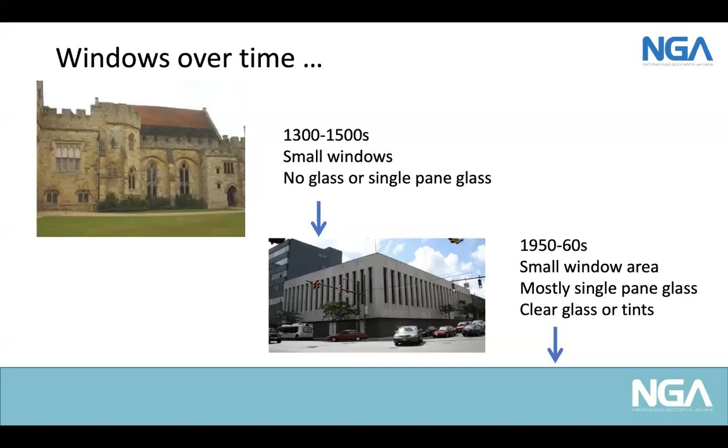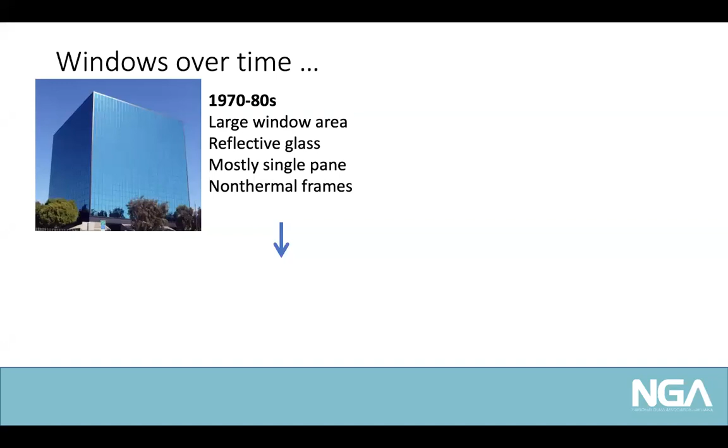Then let's go ahead another decade or two, and all of a sudden you see a huge change. Now you have large window area, these kind of reflective glass boxes mostly, but again, really not as much has changed in terms of energy performance. It's mostly single pane, non-thermal frames. The big difference is, of course, now you're seeing curtain wall construction where the engineering has progressed, where we can, from a structural and installation standpoint, do a building like this. But let's go to today.

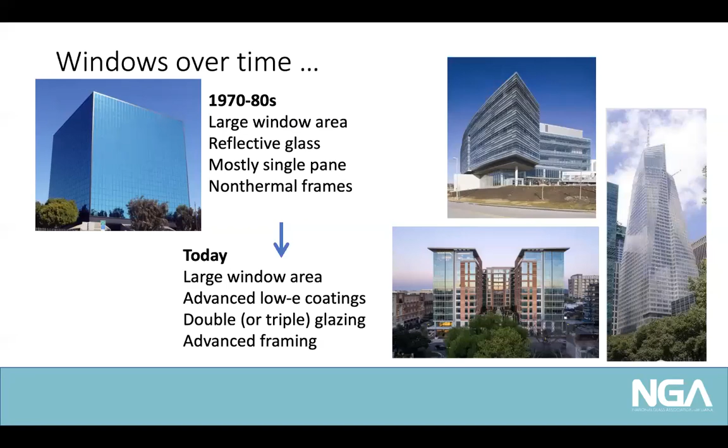So what do we see now? We're still seeing large window area. There's a reason for that: daylight views, health impacts, things like that. But the difference is now that you can do a high performance facade with advanced LowE coatings, double or triple glazing, advanced framing, and we'll talk about some of that today. But again, this is a good point to remind ourselves, why do we have windows?

Really, it's the human aspect. We design buildings for humans. We don't design them just to sit in a cave. There's the human aspect, occupant health and well-being. There's a number of studies done over the years showing that having access to daylighting and quality views produces better learning, faster healing, higher productivity, higher value.

Some examples show better test scores in students, increased retail productivity. Workers are more productive, absenteeism is less. In healthcare settings, you see decreased use of medicine, decreased hospital stays, which also has a financial impact as well as being beneficial to the patient, and increased retention of nurses and healthcare workers.

So it's really pretty dramatic, and it's just a good reminder that yes, there's a reason to have windows, yes, there's a reason to have daylight and views. But then how can we make that a high performance facade at the same time? There's some resources that NGA has with a lot of this information.

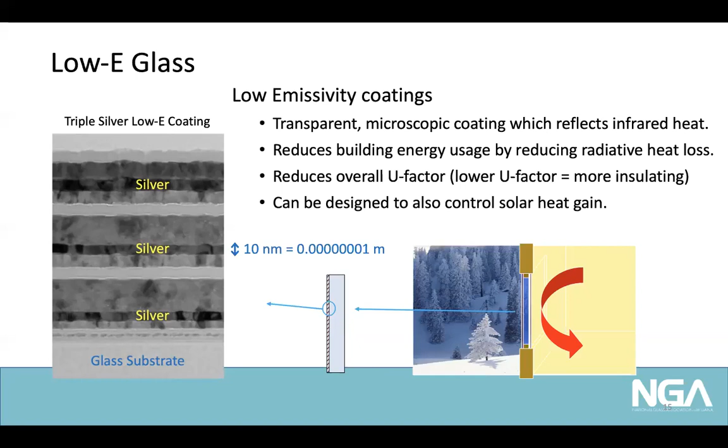But on top of that, you can tune all those layers in there to control solar heat gain, either high, medium, or low, whatever you need for that particular building. So it's kind of serving dual purposes in that circumstance.

You have clear, ultra clear, low iron glasses, tints, LowE coatings, reflective coatings, dynamic products, laminates, films, and it's not just one or two, there's thousands. So it gives you an idea of the range of technology that's in glazing today.

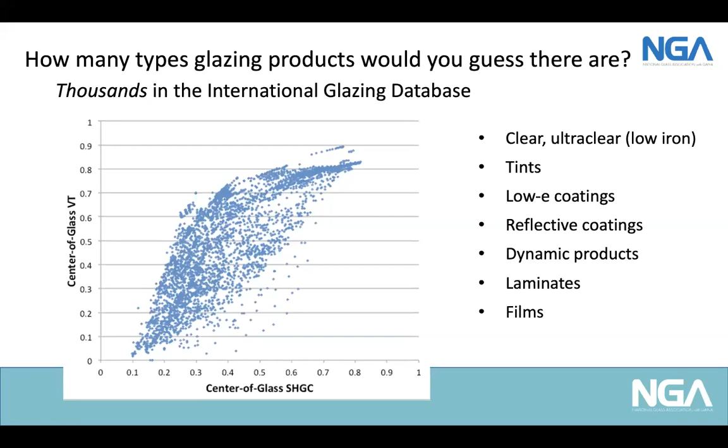So what are some of the newer types? There's a wide range of LowE coating types. It's not just LowE, there's LowE in every range of solar heat gain. SHGC is solar heat gain coefficient, from high passive solar for cold climates to very low solar control for hot climates. So it can be tuned for what you need in northern Minnesota or southern Arizona.

I've shown that picture of a triple silver coating. It has 3 silver layers in it, and it's designed to give low solar heat gain, good solar control, as well as low U factor for the southern climates. There's also a new generation triple silver, which has even lower solar heat gain.

Again, with this wide range of technology, you can have colors or color neutral, and you'll see all of the above available when you look into the marketplace.

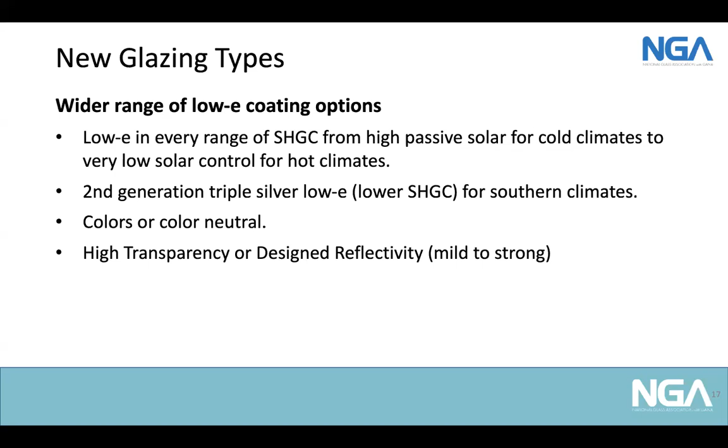The other new trend we've seen is, for a while, it's all about high transparency. Now that seems to be going back a little bit, where it's really up to you guys, the designers and architects. Some people want a very strong reflectivity, especially places like the Middle East, but others want no reflectivity, high transparency. Now there's a new set of coatings out there that give mild reflectivity to try and strike a balance between.

What else is out there? Dynamic glazing - hopefully you've heard about this by now. Dynamic glazing means it has the ability to change its properties. It's not just the same solar heat gain and visible light transmittance all the time. It can change. The most common are electrochromic or thermochromic glazing that can reversibly change its properties to optimize energy performance and glare control by the hour, the day, the season. It can be controlled by photosensors, occupancy sensors, time scheduling, or even just manual controls.

The solar heat gain can vary in the same product throughout the day, from about the range I typically see, which is from about 0.09 up to 0.47 or so. The VT, the visible light transmittance, can range even a little farther, from about 0.02 to give very good glare control, all the way up to a transparent coating, like a 0.62 range. So a wide range of control.

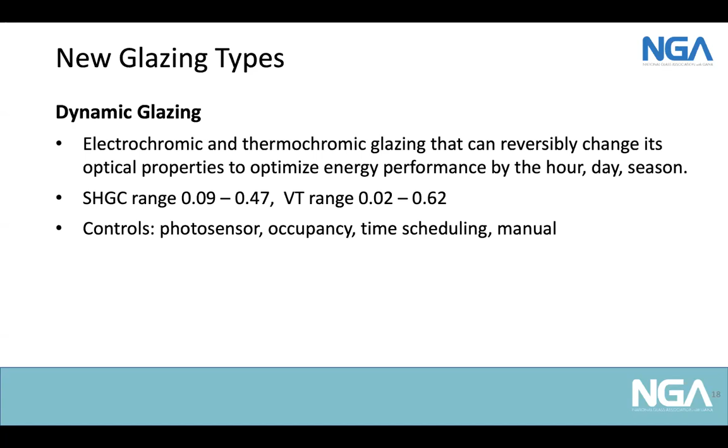I will note that privacy glass should be viewed differently. You may have seen this - it's usually used on the interior, like in office spaces, where you flip a switch and it'll turn from clear to white or other colors. It's more for privacy. That actually doesn't have much impact on solar heat gain, so it's usually not used on the exterior of the building. It's more changing it from a transparent to a scattered, translucent look. So in my mind, I consider dynamic glazing and privacy glass as separate products.

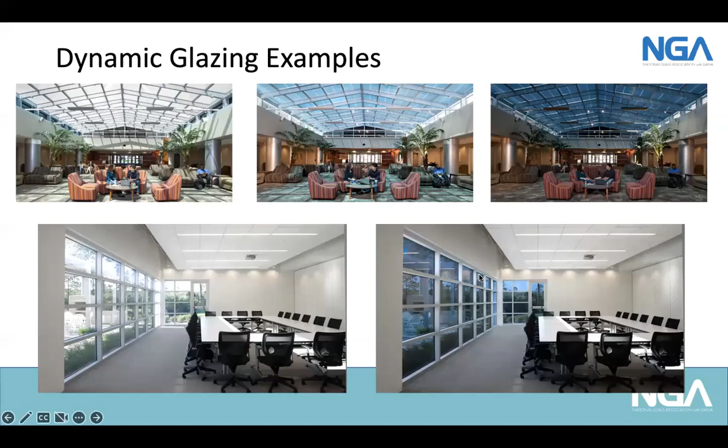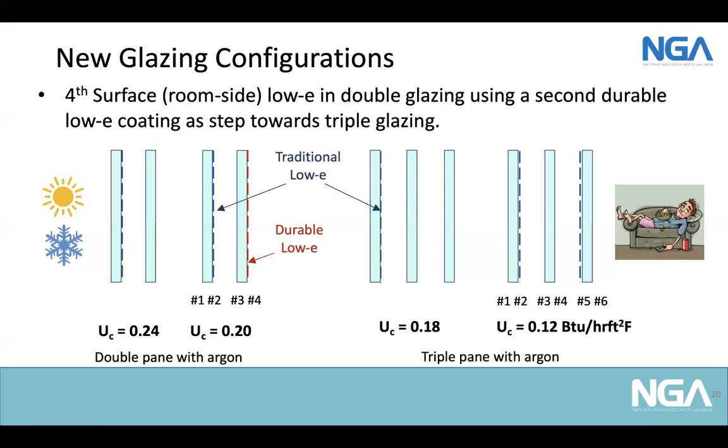Most traditional placement is on the number 2 and number 5 surfaces, although you can do other things as well. And then all of a sudden your U factor for the glass only is dropping down to 0.12, so very high performance.

The other one I want to mention that you may have heard about are thin triples. This is triple glazing, just another form of triple glazing with no difference in that aspect. What is different is they call it thin triple because it uses a lighter weight, thin glass in the middle.

The example shown on the screen is kind of the ultimate, where in this case the thin glass is as thin as 0.7 millimeters, although it's probably more common to use around 1 or 1.2 millimeter. So it's very thin and you can narrow the gaps, and that whole triple glaze package fits in the same width as a double glaze package. That means you don't have to change the frame.

So you can put that triple glazing performance in a good thermally broken or non-metal type double glazing frame system. When you use those narrow gaps, you need to optimize the gas mix, using either krypton or a mix of argon and krypton to optimize performance with those narrower gaps. So this is what you may have heard about in the residential world as a thin triple.

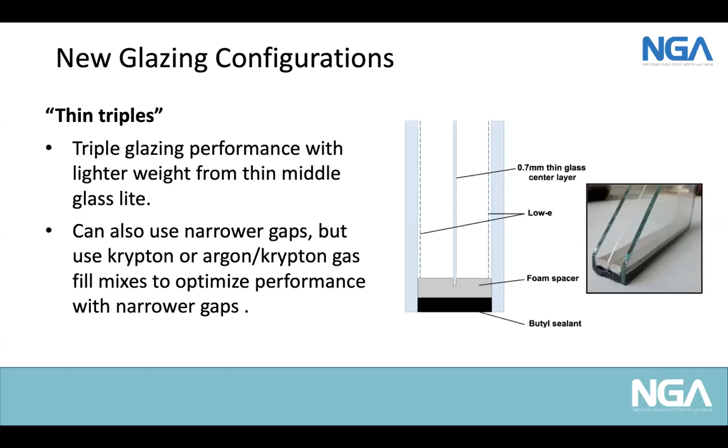There are also some companies exploring thin triples on the commercial side, where they're not going down to the 1 millimeter in the middle, but using traditional 1/4 inch or 6 millimeter glass on the outer lites, and in the middle just using a 2 millimeter or even down to 1.6 millimeter glass. It's the same idea - thinner than normal, and you can get triple glazing performance in a little narrower frame or glazing package.

What else will you see out there? Vacuum glazing. I hope you've heard of this, if not seen it. This is a dramatic improvement. Now we can go lower than that typical 0.24 U factor, again talking center of glass, double glazed unit, down to 0.1. This is where you have 2 lites of glass separated by a very thin gap of vacuum, 0.2 to 0.3 millimeters.

It's a vacuum, so it doesn't need to be very large, and in fact it's a little easier to do when it's narrow. Because you also need to put in support pillars since there's a vacuum - you don't want it to collapse onto each other and touch. And you include a LowE coating.

So if you think back to your physics, it's a vacuum, so there's no convection. There's a LowE coating, so there's no radiation, and the conduction is minimized through the glass, and then by keeping those pillars small and the edge design done properly, you get very high performance.

The nice, interesting thing is it can range - the products out there range from about a little more than 6 millimeters up to about 8.3 millimeters. That's thin enough, you can often use it to replace single glazing.

So it's a very interesting product for historic applications, like the picture shown on the right, where they took a single pane historic building. They didn't want to change out the windows - the building owner either did not want to or could not change the overall windows because of historic covenants or restrictions. So they swapped out and put in VIG there and get very high performance.

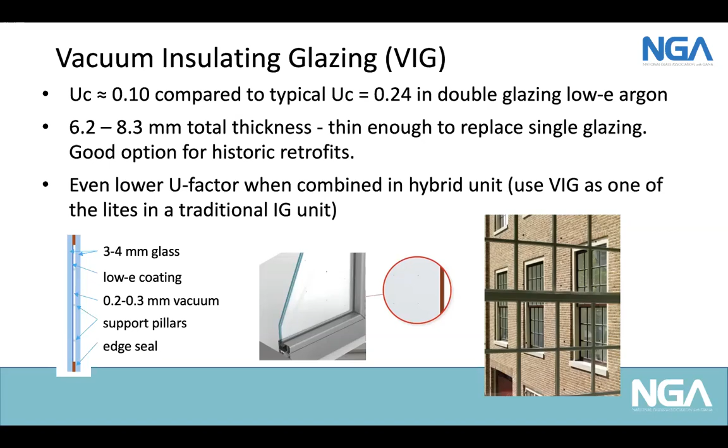You can even get lower U factor when you combine it in a hybrid unit. Think of this as like a traditional IG unit, but one of the 2 lites is vacuum glazing. So you have a vacuum glazing plus a spacer, and then another LowE or another coating. You get very low U factor, very high performance. So hopefully you see that, start to explore that as a designer or specifier, and look for that if you can use it in your projects.

Other new thing on the glazing side is glazing for on-site renewable energy production. ASHRAE 90.1, and it looks like IECC, are both going to be requiring on-site renewable energy in new buildings, so you can put it anywhere you want. You can do rooftop glazing, but BIPV is coming on, where you can use photovoltaics, solar production in lots of places. You can put it in overhead glazing.

You can, like the lower left, a walkway in Salt Lake City where they're using it in the glazing over a walkway canopy. You can put it in sunshades, you can put it in opaque spandrel areas. Everything you see on the screen here is photovoltaics generating electricity.

There's even vision glazing now, where the two pictures on the right show clear, transparent glazing that is producing electricity. It's using the UV and infrared parts of the spectrum to make electricity. And you now have the opportunity to put this on all your south facing, or even east and west orientations, and use all that glass area to generate power. So it's an interesting new technology coming up.

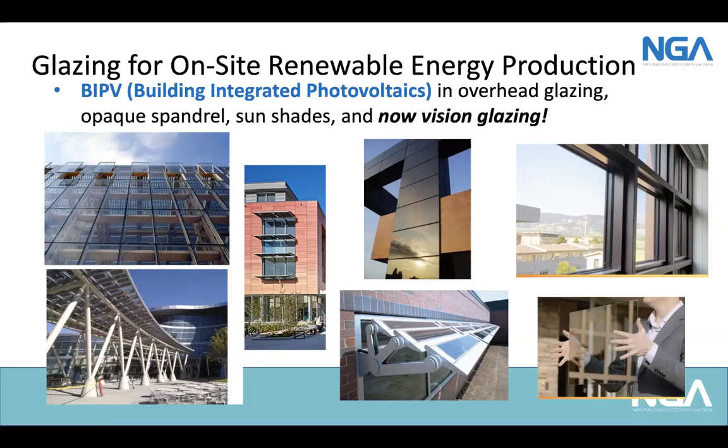So we've talked a lot about glass. What about framing? What's new in framing? First, we're talking commercial here for the most part. So 90% of commercial framing, commercial fenestration, uses aluminum framing. That's out of all the market studies. And there's a reason for that: structural performance, durability, ability to do wide spans with narrow sight lines, design flexibility with custom profiles, as well as the recyclability and sustainability aspects of aluminum.

But we all know aluminum as a material has high thermal conductivity. So so-called unbroken aluminum frames do not perform well from an energy efficiency standpoint. So what do we do? This has been around for decades, but you use a low conductivity material to break that heat loss path while still maintaining the high structural performance. And these are known as thermal barriers.

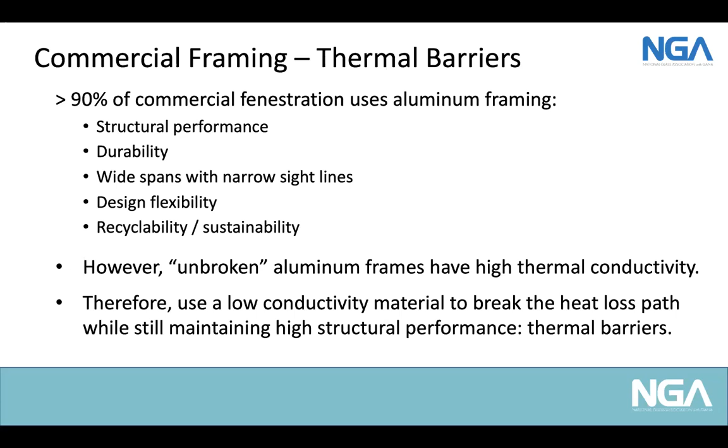I'm sure you've used these, seen these. I do want to talk about terminology. There's thermally improved and thermally separated. You need to be careful - that's different than thermally broken. And NFRC and other places

basically draw the distinction at a non-metal material with a greater or less than a quarter inch. So basically older curtain walls where you just have kind of like a little thermal isolator - that's thermally improved or thermally separated. That's not a full thermal break. A full thermal break has a wider separation with a non-metal structural material.

There's a lot of technologies out there, some of the terms you may see: polyamide struts, pour and de-bridge polyurethane, fiberglass, double thermal barriers. And then we can also combine that with non-metal pressure plates in more complex shapes.

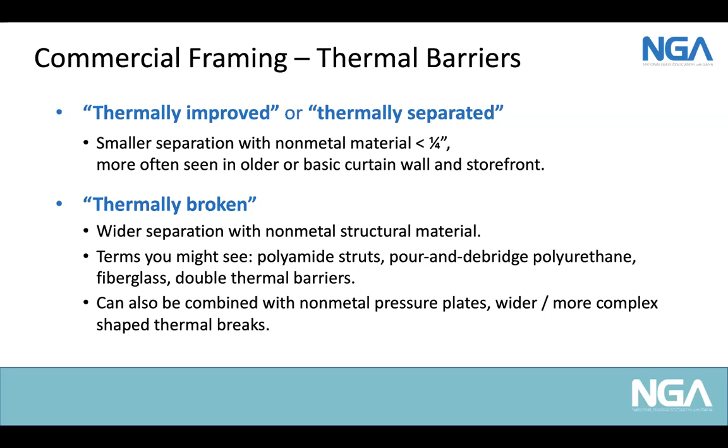So pictures help. So here's some of the technology out there. And again, I just want to stress, this is not just your basic thermal isolator on the bolt, or quarter inch separators. At least a full thermal break is kind of what I consider standard performance.

And then some of the newer technology coming out, you can see on the screen, it's a double pour and de-bridge, like on the left, and the circle with the yellow, you see two thermal breaks in series there. You can have complex shapes or use fiberglass inserts, like you've seen in some of the other photos. You can use fiberglass or polyamide pressure plates on a curtain wall to again improve the thermal performance.

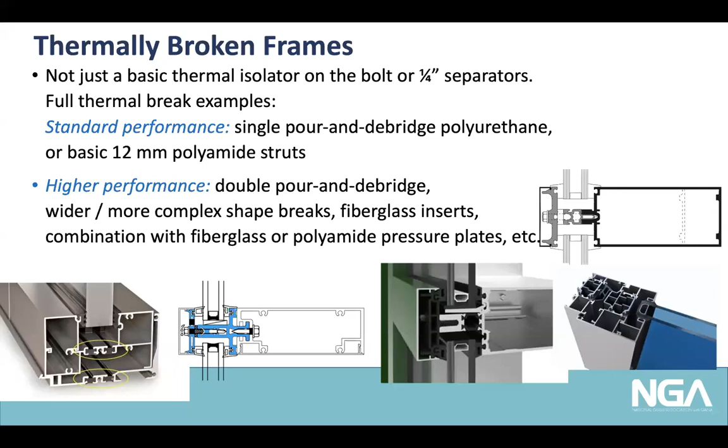And that's an easy swap out. That's an easy thing to do, because installation is basically just the same, yet you're getting better thermal performance.

So what about the energy codes, which is more of my specialty area. I work on the committees that develop the energy codes. What's happening for fenestration there? First of all, the overall stringency in the codes - this should not surprise you. This is a graph developed by PNNL, Pacific Northwest National Lab, showing how the code's stringency has changed over time. So if they just put 1975 as the benchmark, it shows where we're at.

And you look where we're at, late 2019, ASHRAE 90.1 2019, energy use of buildings has been cut in half if it's built to the standard. So that's very significant, we've made big progress. Try and think about other industries that have made that progress, have doubled their efficiency over that time period - very few. So we should be proud of that. And 90.1 2022 is meant to be published probably in a matter of weeks, and it's going to have another significant step, probably at least another 5% drop there as we move forward.

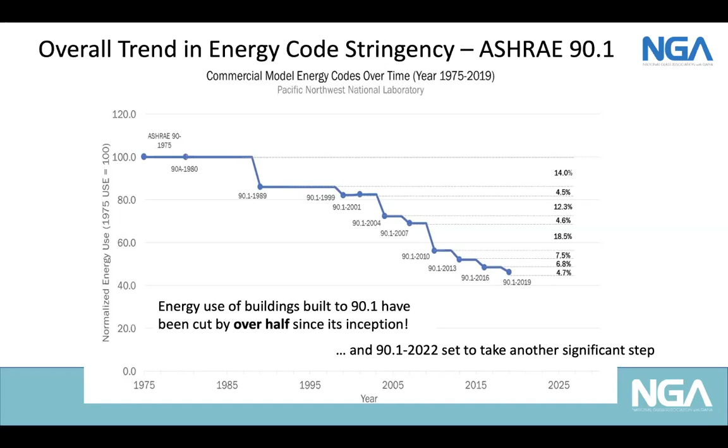What about the windows? We see a similar trend in the stringency. This is just showing the U factors for fixed windows as an example in ASHRAE 90.1, and you can see over the last 15 years, depending on your climate zone, they've dropped by 20 to 60%. And that big jump you see is going from single to double glazing that happened back in the early to mid 2000s in the South.

And so we continue to see U factors dropping in commercial fenestration codes. Quick note, other than those center glass numbers I mentioned earlier, everything in the codes are whole assembly numbers, including the framing, not just the center of the glass. So you have to look at the number for the combined assembly.

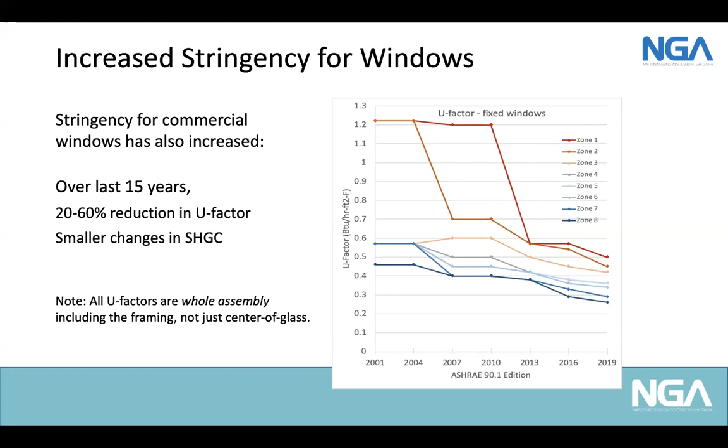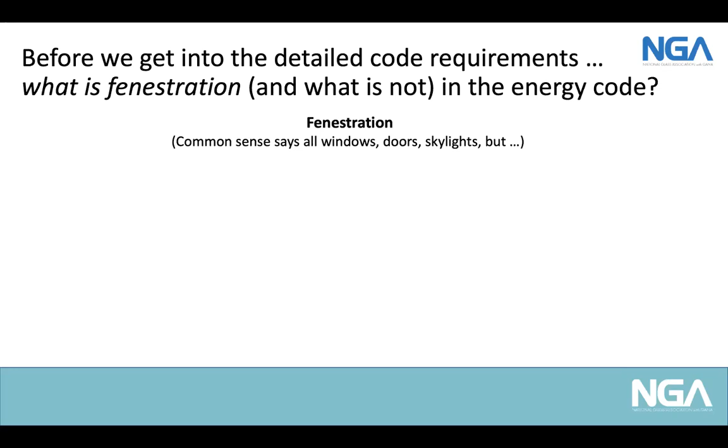So before we get into the codes, where they're heading, what they're doing, I found this an interesting exercise in a class I was teaching about what is fenestration and what is not in the energy code. And you would think it's obvious. You'd think common sense would say it's windows, doors, skylights. Yeah, that's fenestration. But what is fenestration in the codes?

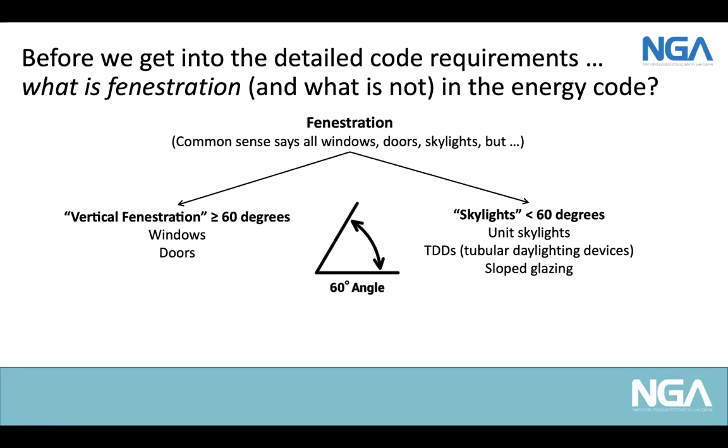You kind of have to split it. And so there's this 60-degree angle. If that angle is more than 60 degrees, it's vertical fenestration, so that's going to be your windows and doors. And then less than 60 degrees, it's considered a skylight. That includes unit skylights, as well as tubular daylighting devices, but also slope glazing is called a skylight under the energy codes. It's all based on that angle.

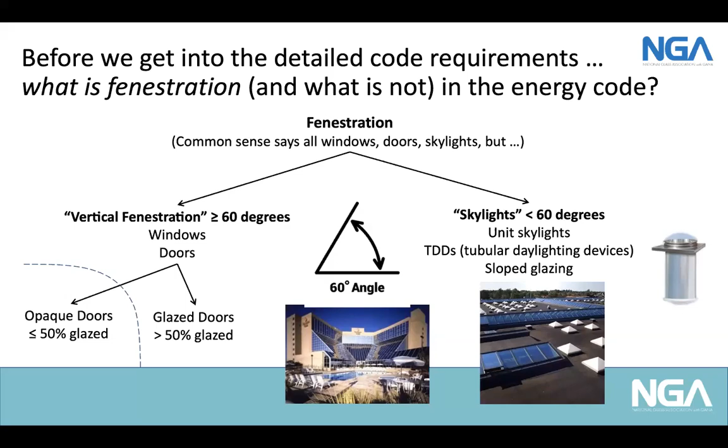Over on the left, we all know kind of what vertical fenestration is, but I will draw out a distinction on doors. Not all doors are fenestration under the energy code, which sounds weird, but opaque doors, meaning less than 50% glass, are considered under the opaque criteria. Glazed doors have to have more than 50% glass, and then that does fall under vertical fenestration.

Now that angle is a little weird because a lot of you might be familiar with what's in the International Building Code, and they use a different angle than ASHRAE 90.1 or the IECC. So you may have seen this 15-degree angle. Overhead glazing greater than 15 degrees from vertical must be laminated or have screens under the building code. Whereas the energy codes say use a 60-degree angle from horizontal, coming from the other direction. So really 30 degrees from vertical is considered a skylight. So it's a little different.

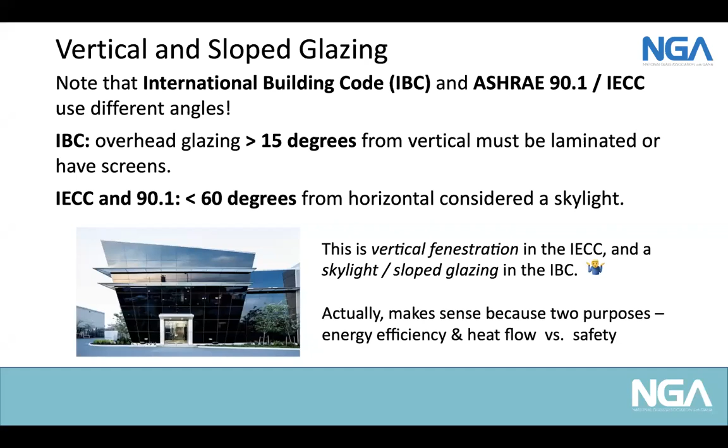It's a little confusing. If you look at that building in that picture, that's vertical fenestration in the energy code, but it's skylight or sloped glazing in the building code, which sounds a little weird. But when you think about it, it sort of makes sense because it's for two different reasons. Energy efficiency and heat flow transfer is a little different when it's sloped versus vertical, the way the convection works. Whereas the building code is focused on safety, like when do you have an overhead glazing hazard and when does that need to be laminated and so forth. So just be aware that they're two different purposes, two different angles, when you're dealing with safety glazing and lamination or screens in the building code, versus what's considered a skylight in the energy code.

There is a research project going on right now at the Charles Pankow Foundation with DOE support, where they're trying to better characterize spandrel, and that will hopefully enter into the codes at some point with more realistic numbers for spandrel. Otherwise, you need to look at the R value table or use trade-offs to comply.

I'll side note here, I mentioned BIPV, building integrated photovoltaics. Spandrel is a great area to include that. There are technologies out there. You're not using it for daylight or view, so go ahead and get some energy production on the south side of the building, put BIPV in the spandrel area.

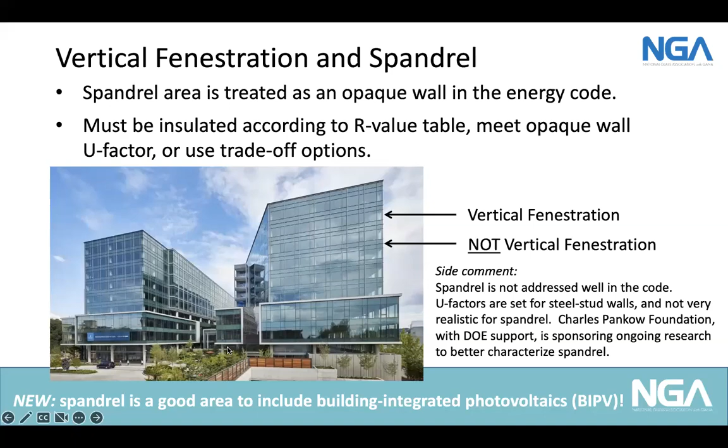So let's go into the codes a little bit. Energy codes, there's ASHRAE 90.1, and then there's the International Energy Conservation Code. They are both developed separately, so sometimes there are differences, but at least now they're using the same climate zone map, with zones going from the far south. Climate zone 0, don't worry about, that's not in the US, that's in parts of South America, the Middle East, and Southeast Asia, but it doesn't occur in the US.

Zone 1 is like the southern tip of Florida, and it's creeping into Texas, like Brownsville, Texas. Zone 2 is kind of hitting the Gulf and a lot of Texas, and then it keeps numbering up. I'm in Wisconsin, on the border between zone 5 and 6, and then it goes all the way up to zone 8 on the north slope of Alaska.

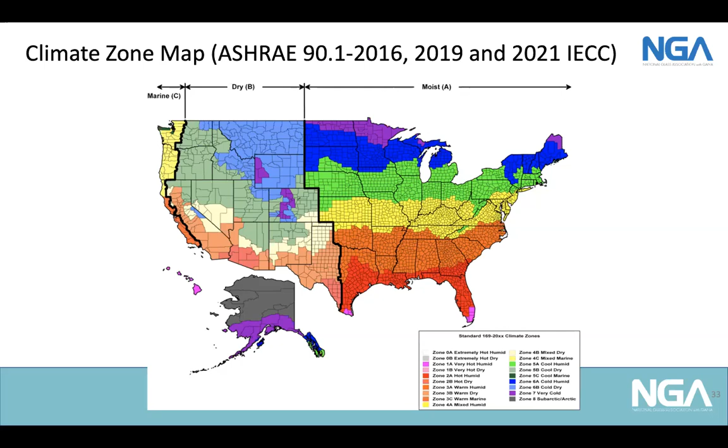And then when you go into the energy codes, you're going to see big ugly tables like this. Don't worry about the exact numbers. It was asked in the chat, yes, these slides will be made available, and this table will be in there where you can look up your particular zone. So zone 4, that's like Baltimore or Kansas City.

There are different U factors listed based on the energy code, whether it's which version of ASHRAE 90.1 or which version of the IECC, and it's based on whether it's fixed, operable, or entrance doors.

So there are tables like this, and it's a good point to note that all codes are local. I'm talking about ASHRAE 90.1 and IECC as national model codes. They don't have any power until they're adopted at the local level, either by the state or even down at the city level. Denver has a very progressive energy code, but other parts of Colorado do not.

And some states are using ASHRAE 90.1 2010, whereas other states are using 2019. So you need to know your version of the code and see what's being used for the local project. But I just highlighted one example where you can see how the U factors are coming down, an example of increased stringency.

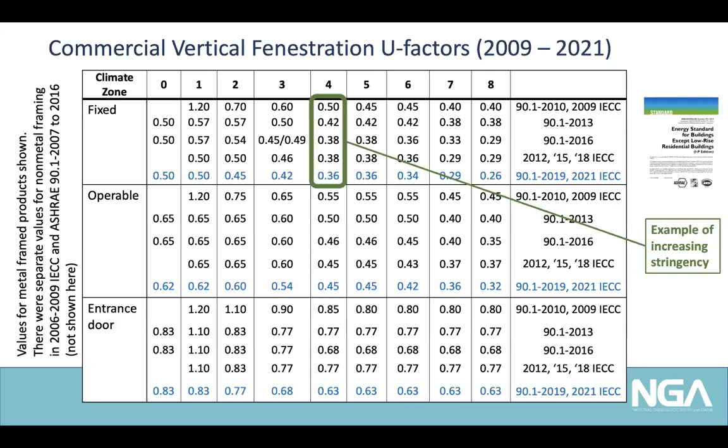As you go from south to north, you're going to have to use more energy efficient features. Everything's going to be double glazing, plus you've got to do certain things to meet the solar heat gain in the south. In zone 0 and 1, you can use pretty much double glazing, LowE, to hit the solar heat gain, but other than that, kind of do whatever you want.

Getting into zone 2, you have to add a thermally broken frame, or you can use a thermally improved frame, not at the full thermal break, if you also have argon in there instead. Getting into more of the center of the country, now you really do need a true thermal break.

So that's kind of where things are going. Then you go to the far north, you can keep throwing on more of these features. In theory, zone 7, you can still do double glazing, but more likely at zone 7 and 8, you're going to be going into triple glazing.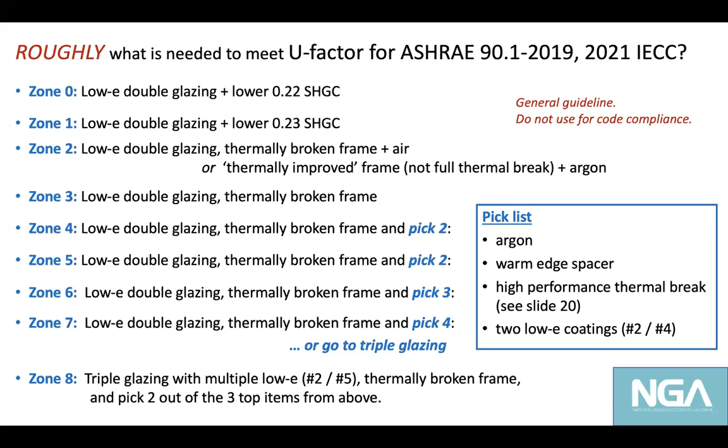What about solar heat gain? They stayed the same for a long time with low solar heat gain in the south, generally around 0.25, and medium or high solar heat gain in the north, like around 0.4 to 0.45.

That's changed a little bit with the latest energy codes, 2019 90.1 and 2021 IECC. They list two numbers, one for fixed, one for operable, just like there are separate U factors for fixed and operable, but don't let that panic you. It's the same glazing type. So even though it says like 0.25 and 0.23 in zone 3, that's actually the same glazing type.

It's just accounting for the fact that the framing's different, generally in a curtain wall versus a slider or something like that. It's really the same glazing type. The only real change is they're starting to require these newer, lower, next generation triple silvers with lower solar heat gain in zones 0 and 1. You also get credit for overhangs and sunshades. So these are the overall solar heat gain numbers, but you can do it with the glass, but you can also do it with sunshades, overhangs, things like that.

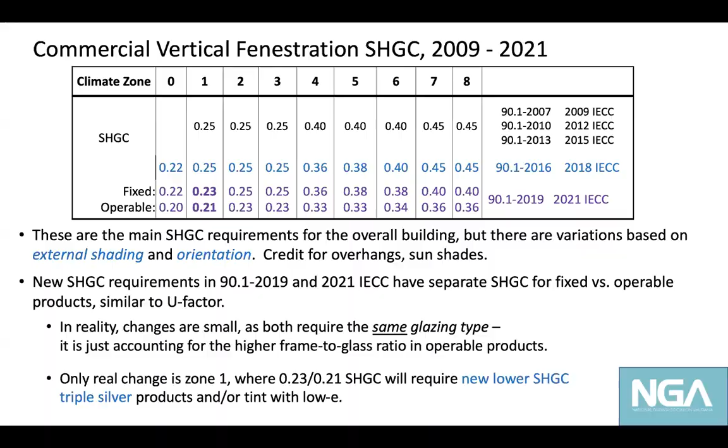So what's coming, 90.1 2022, which I mentioned will be published, and you'll probably see some news releases on that in the coming weeks. There are new thermal bridging requirements. We'll talk about that. There's a new envelope backstop limiting how much envelope performance can be traded off in the performance path, although it's fairly flexible, at least the one going into ASHRAE 90.1. There's a new additional energy credits section, which is a way that they can use to advance the energy code, where it says meet the main energy code, meet the basic requirements, and then on top of that earn points.

So this would be something that will involve choices for the architect and specifiers and designers out there, that you're going to have this big list. You're going to say, I need to earn 50 points for this type of building in this zone. And then you have a list of many options. It could include different mechanical systems, on-site renewable energy, tighter air leakage, better daylighting.

And then the ones that affect the fenestration industry are really, you get extra points for going better than the base requirement for high performance fenestration, using shading, daylighting, on-site renewable energy, all are kind of in there as options. But that will be a new thing. ASHRAE is going to come out, and that same concept looks like we'll go into the IECC as well. ASHRAE and Pacific Northwest National Lab, who are kind of the champion of it, are developing training materials to help people with understanding and complying with those new requirements.

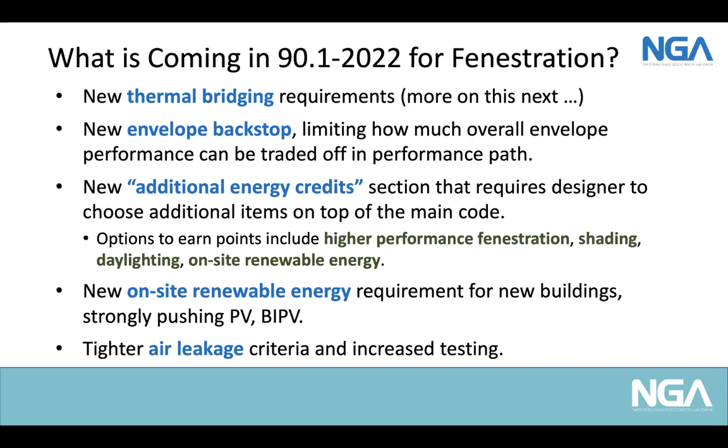I mentioned thermal bridging. It's kind of new. I want to mention what I mean by that. Some of you may have heard about it. Thermal bridging is, I'm not talking about like a thermal barrier or thermal bridge in the window frame. That's accounted for in the NFRC U factor already. I'm talking about the rest of the building where it's bypassing of insulation. So the most common areas are like parapets, balconies, brick shelf angles, things like that.

So that Chicago building on the left is a famous example, beautiful building. But all those balconies, concrete slab edges just sticking out, are basically acting like radiator fins. And the IR image shows that you can do balconies in a good way where they're separated from the environment. But in this particular case, they're just acting as radiator fins.

So that's thermal bridging to the max, and it greatly affects the energy performance of that building. So from the fenestration standpoint, it's really affecting the details at the wall window interface. How do you install the window, and, well, it's not really about installation, it's about the design. How do you design the details for that interface between the window and the wall? So this is something really for the designers to take a look at. It also affects sunshade attachment as well, because that's a potential penetration through the insulation.

Now, a lot of you are already familiar with how you control or draw the water and air lines when you're looking at a facade, and make sure you control that. It's the same idea, except now you're going to draw a thermal line where you're going to look at the continuity of that thermal line. Where are you breaking it up? I'll show an example of that here in a second.

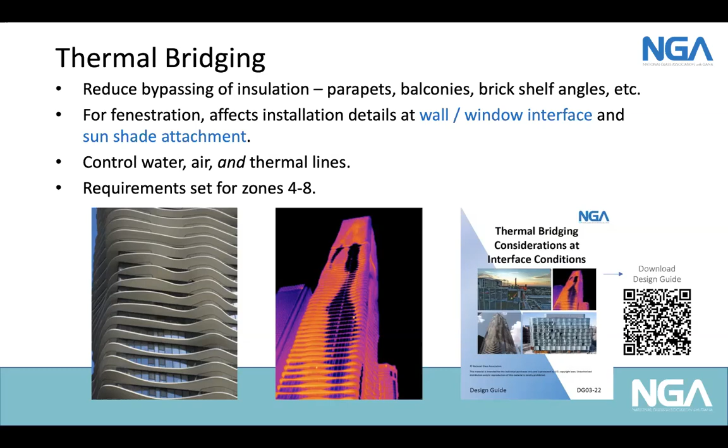But here's what I mean by controlling that thermal line, just like you're probably used to looking at your water line and your air line. Here's two examples where they're really just trying to get, at a high level - for instance, there's a little piece of metal flashing under there, yes that technically bypasses some things, but we're not going to worry about that for now. We really want to get the general alignment. On the left there, that's what would be considered an efficient and compliant design detail, where everything is lined up - the glazing unit, the thermal break in the frame, and the insulation all lined up. So there's really no major bypass, and that red line there is showing the so-called thermal line.

Everything's aligned. In contrast, the one on the right - I don't know if this is necessarily a common building - but if they have a wall cavity where they're putting the insulation on the interior, you could have good insulation, a great efficient window system. Here we have double glazing, LowE, and a good thermal break. The glazing and the thermal break are lined up, but the insulation is over on the other side. So on paper you might think you have a good wall, a good window, great. But when you look at the detail, you see that where that diagonal line is, there is no insulation - nothing stopping heat flow at all. That's a big thermal bridge where you're going to lose a lot of heat.

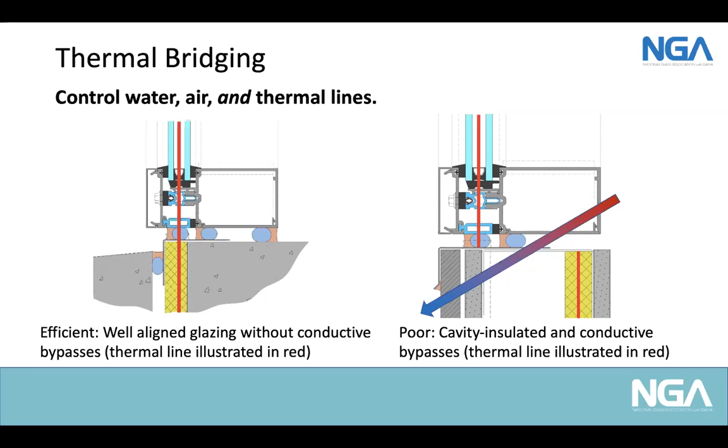And like I mentioned, this is more of an issue for the designers than the manufacturers, because it's about the details. But in general, what ASHRAE says is they keep it very basic: just align the glazing with the insulation layer. If you're doing a recessed window, wrap the insulation back - you can wrap it back up to the window, not under the window because of structural issues, but back to the window. Or you can use a wood buck as another option, which we see sometimes in concrete buildings, where they'll have the opening and then use a wood buck that the window goes into. But there are multiple ways you can do it.

Or you can do a very detailed psi factor calculation. They're doing this up in Vancouver and to some degree in New York City and so forth, where you can do a psi factor - it's kind of similar to a U factor, but from a linear standpoint, looking at the interface condition.

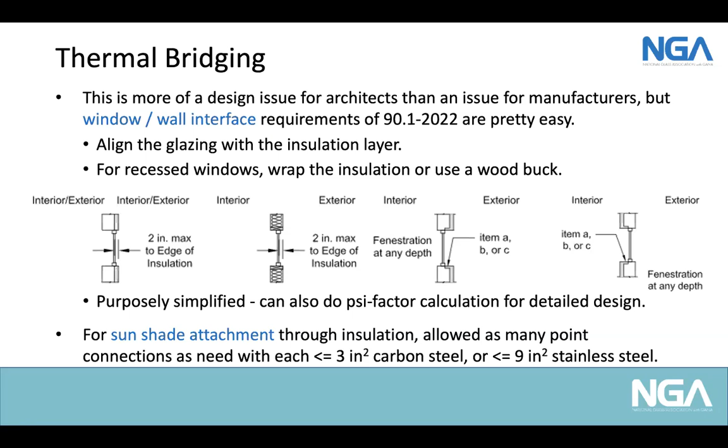For sun shade attachment, it's pretty easy. If you're going through the insulation, you can have as many point connections as you need for structural requirements. Each has to be less than 3 square inches if you're using carbon steel - so like if you're using those knife edge blades with carbon steel, it has to be less than 3 square inches. If that's not enough for you, just change it to stainless steel and you can get up to 9 square inches, which is plenty.

Lastly, I'm going to wrap up with existing buildings. We work very hard on new building technology and codes. That's everything we've just been talking about. Yet we're ignoring the vast amount of energy used in existing buildings.

DOE has estimated there's like 2 billion square feet of single pane glazing still out there in commercial buildings. On the residential side, DOE estimates there's 47 million homes with single glazing still out there, and a similar number of homes with less efficient double pane clear, meaning no LowE glass. So better than single pane, but still not what we would consider an efficient window.

To address this and increase focus on existing buildings, many locations, especially cities, are starting to enact, or have already enacted, building energy disclosure laws. This basically says if your building is over a certain size in that city, you must publicly disclose your annual utility bills, simply from a transparency standpoint. It helps identify your Energy Stars and your energy hogs. Maybe that makes a difference when you go to sell that building or lease out that office space. So it's the first step.

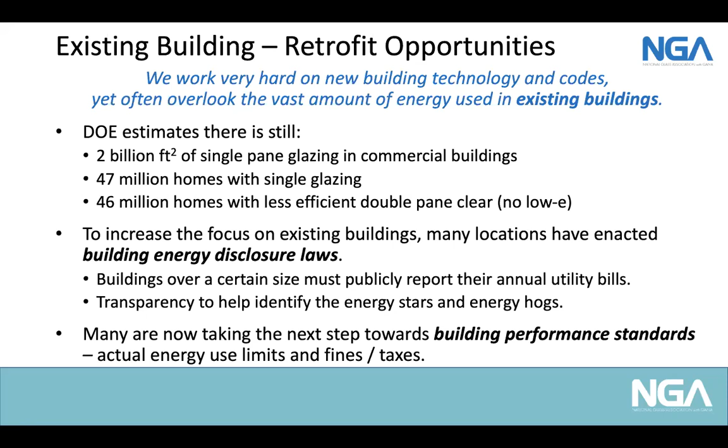But many are now taking that next step towards what are being called building performance standards, which takes that disclosure and sets actual energy use limits, with fines or taxes if you don't meet them. They're expanding rapidly. A lot of you may have heard about New York City Local Law 97, which was probably one of the first examples. But it's not just New York City.

St. Louis, Boston, Washington State, District of Columbia, and Colorado at the overall state level have all enacted these now. Some use carbon limits, some use energy use limits, starting roughly 2024 up to 2026.

The fines are coming, but building owners have already started planning, because even just doing a simple project commonly takes a year now, minimum. So they have to start planning now if they want to beat some of these fines. It's a large incentive to upgrade existing buildings.

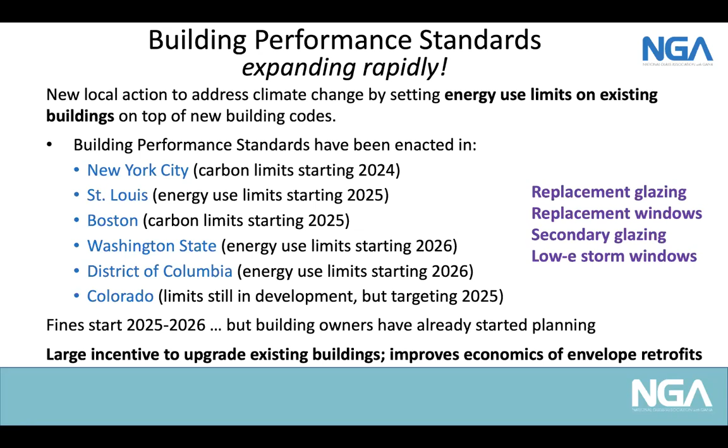And of course they're going to do things like lighting and mechanical, the easy things first, where they can. But it also improves the economics of retrofits, so they're starting to look at the envelope, replacement glazing, replacement windows, secondary glazing, LowE storm windows on the residential and multifamily side, things like that.

So what does this mean? It's great for fenestration upgrades. There's great technology for replacement glazing. I mentioned vacuum glazing is one great option for historic buildings, where you have single pane but you can't change the window, yet you want to change the glazing - go to vacuum glazing.

Also just traditional, non-historic buildings - if you can get someone to upgrade their double glazing, replace it with a modern LowE, especially two LowE coatings, great, do that. You can even do replacement windows, but there are many cases where you can't. Rip-out and replacement is either impractical or cost prohibitive, or maybe in historic buildings you're not allowed to, or the building owner doesn't want to replace those existing windows.

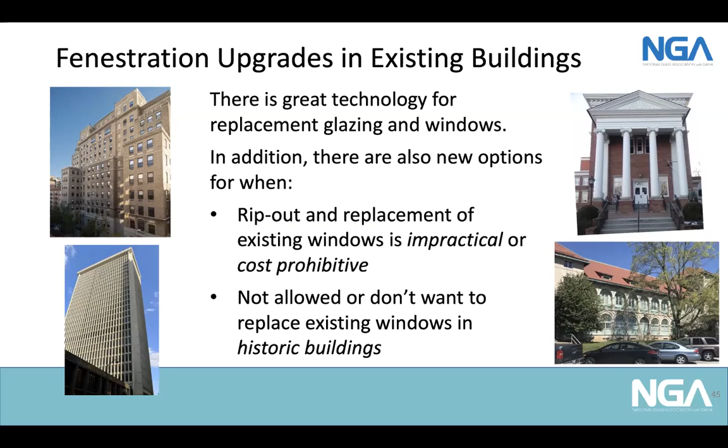Here's some more examples. I've talked through the technology already. You can do operable or fixed options. So when you're doing multifamily and you want natural ventilation, there are operable versions available. You can do interior or exterior, and depending on the case, the cost can be significantly less than a full window replacement. So the options are good, technologies available for both window replacement and glazing, and when you can't do those things or it's cost prohibitive, look at these other options.

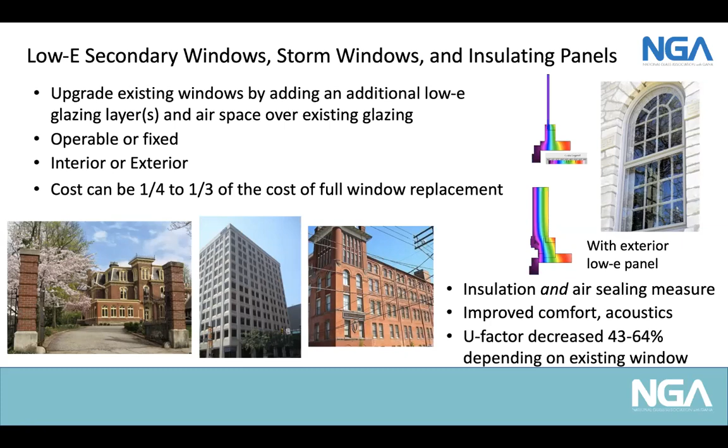Finally, I'll mention that it improves the insulation and thermal performance, but it's also an air sealing measure. I've been involved with case studies where just doing the windows, nothing else in the building, no other air sealing, we decreased the overall building air leakage by 10%, which is significant when you're not even touching everything else in the building. And with that comes improved comfort and improved acoustics, and many of these projects are actually doing it for the acoustics as well as the energy performance. So look at those options as well when you're dealing with existing or especially historic buildings.

There is product information out there. EPA has an Energy Star program for exterior and interior storm windows, basically LowE storm windows, and they have information on their website. There's also the Attachment Energy Rating Council, which has a new certification program for both storm windows and commercial secondary windows. So you can look for information there on some of these products as a new alternative.